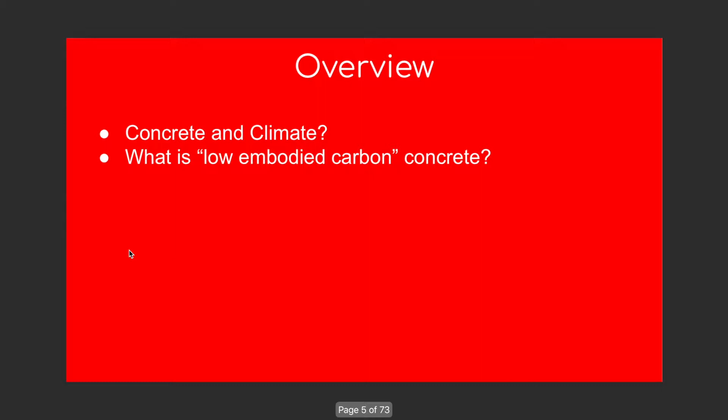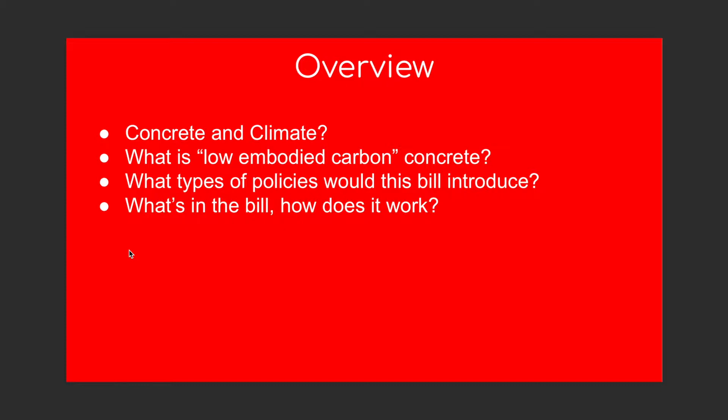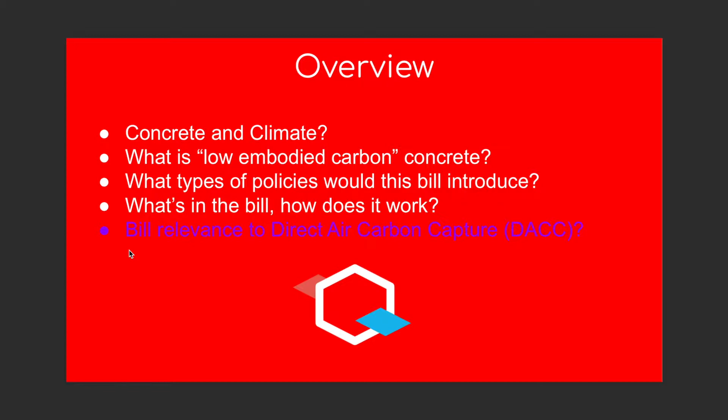I'm going to give you a quick overview in this video. First, why does concrete even matter to climate, since this bill is focused on concrete? What does low embodied carbon concrete even mean? You saw that right in the title of the bill. What types of policies does this bill actually bring together and introduce? Then I'll take a deeper dive into how those policies would work in practice based on how the bill is written. I'll also quickly allude to why this is even relevant to direct air carbon capture, which the OpenAir Collective is focused on advancing. I'll end with a summary of the key strengths of the bill. So let's get right into it.

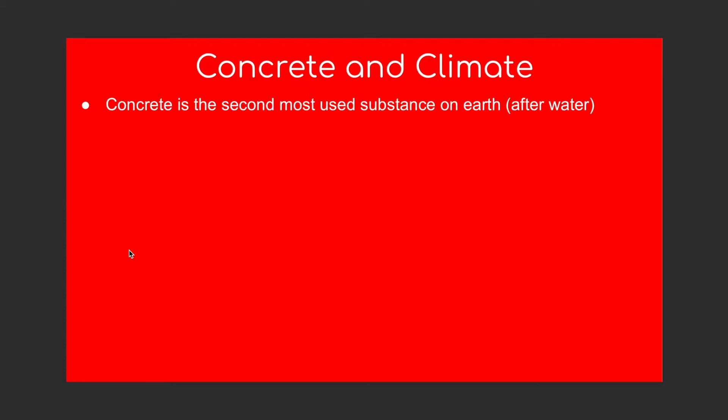First things first, concrete and climate. Why does it matter? Well, first, concrete is the second most used substance on Earth after water, so there's a ton of it, and that's key to its relevance here. And we keep using more of it. In fact, between now and 2050, it's estimated that we're going to build the equivalent of about one New York City a month in terms of global construction, and that's going to involve an enormous amount of concrete and Portland cement, which is actually the main ingredient, the glue of concrete. We produce about 4 billion tons of that a year, and this is continually increasing. According to the International Energy Agency, we may have up to a 23% increase in Portland cement by 2050.

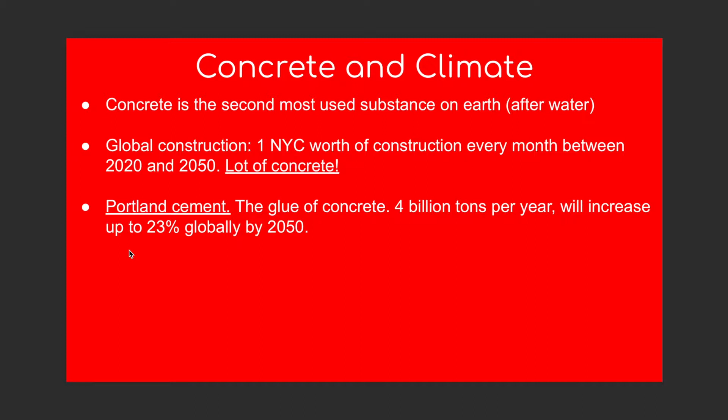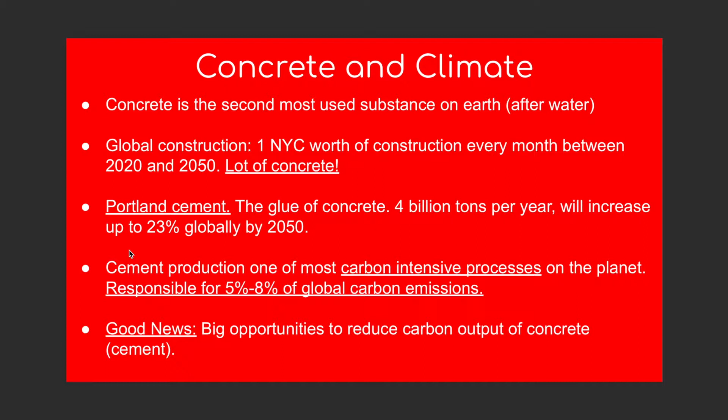Why does that matter? Because Portland cement production is one of the most carbon intensive processes on the planet. It produces about a ton of carbon for every ton of material produced, and it's responsible for up to 8% of global carbon emissions. Now, the good news is that there are really large opportunities to significantly reduce the carbon footprint of concrete, particularly that cement component, which is really at the center of its carbon footprint. And even, which is incredibly exciting for us, there's the potential for concrete to be a net carbon sink. That means it would actually remove more carbon dioxide from the atmosphere compared to what it emits. That would be an enormous victory for humanity and for the climate. And that is really at the center of what the OpenAir Collective is all about: carbon removal. That really explains our engagement with this legislation.

Now, what do we mean by low embodied carbon concrete, which again is right there in the title? Let me explain. Embodied carbon, unlike what's sometimes called operational carbon—a lot of times when we think about carbon emissions, we think about how much carbon is that thing going to use: that car, that building, that plane. Embodied carbon actually is a measurement of how much carbon was emitted in the making of that thing. And that's really what's significant when we're talking about concrete.

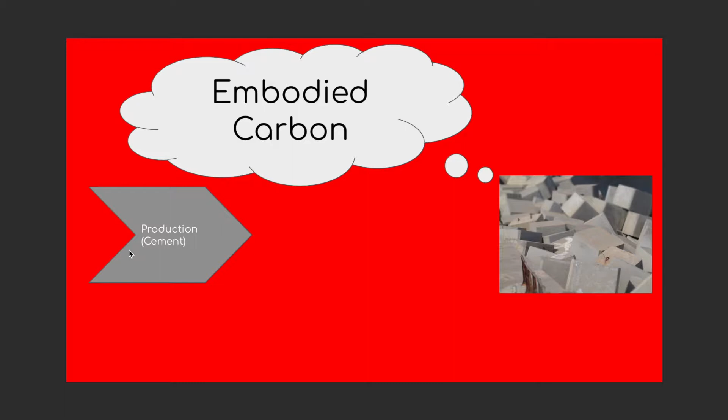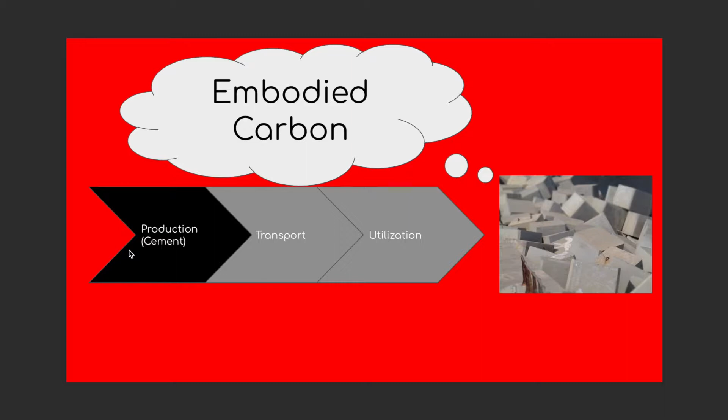That means the production, particularly of cement, which again is the huge outsized part of the carbon footprint of concrete; the transportation—a lot of cement is actually imported from other places that goes into concrete ultimately locally; and then the utilization, the actual laying of concrete, which has some carbon output anyway. So you take all those things together, and that's embodied carbon: how much carbon was used in the making of that thing. And again, cement is the outsized, huge part of that—the actual cement production, the main ingredient.

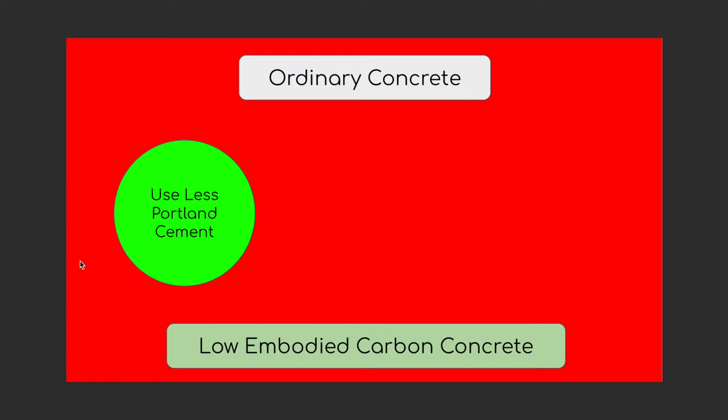Now, how do we get from ordinary concrete to low embodied carbon concrete? What are the methods of doing that? As you might guess: use less Portland cement—we already probably use too much cement in concrete anyway—but you can also substitute other ingredients for it. Use less energy at the facilities where you're making cement and concrete, and waste less material. A lot of the material that's produced, particularly in the cement phase, is just wasted.

So you're expending a lot of carbon for no reason. Reduction in energy, change in energy use, and more efficient use of materials would reduce the embodied carbon. And then the other one, which we're really excited about, is to really use more carbon in the actual concrete itself.

By that, we're talking about what's often called CCU, or carbon capture and utilization, where you're taking carbon that would have gone to the atmosphere, or is in the atmosphere, and actually putting it in the thing itself. That is what makes it of great interest to OpenAir.

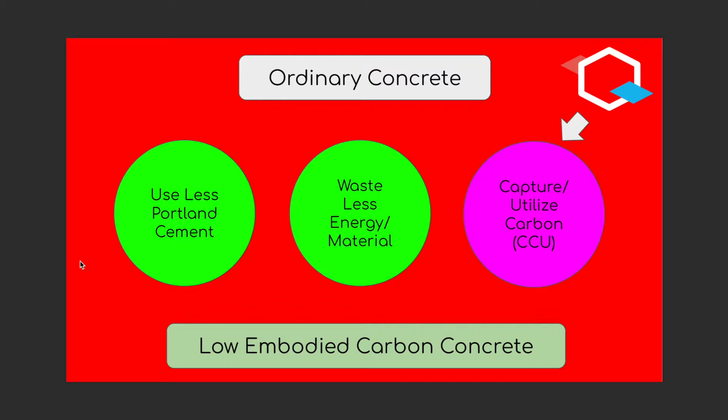Now, how do you actually do that in the case of concrete? How are you capturing and utilizing carbon? One thing is with aggregate. Aggregate is like the gravelly type of thing that you mix with cement to make concrete. You can actually make aggregate out of a process with carbon, pulling carbon from industrial sources or from the air, and then mixing that in with cement to make the concrete. So aggregate is one way.

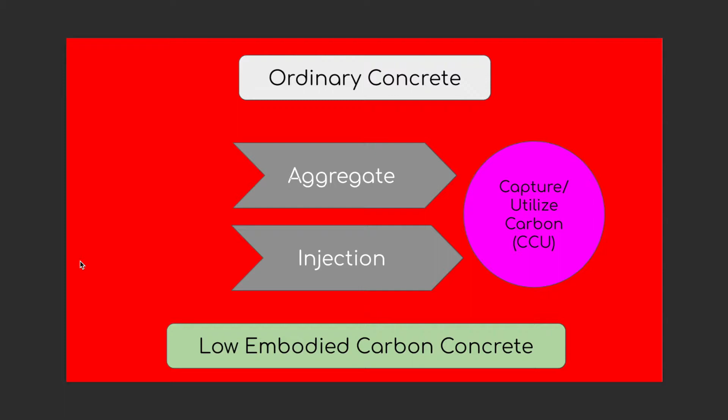And then the other is you can actually inject carbon dioxide right into the curing process, and that makes it stronger. So both aggregate and injection are two ways of utilizing and storing or mineralizing carbon in concrete.

Okay, now back to the bill: the New York State Low Embodied Carbon Concrete Act.

There's a lot of different ways in which governments can actually support new technologies. We can obviously put money into research and development to improve that technology. You can offer incentives to both producers and consumers so that they will both produce and consume that technology. There are all kinds of different ways you can fiddle with regulations to make it possible for the technology to come to market, or even prevent some of its competitors from having advantages in the market.

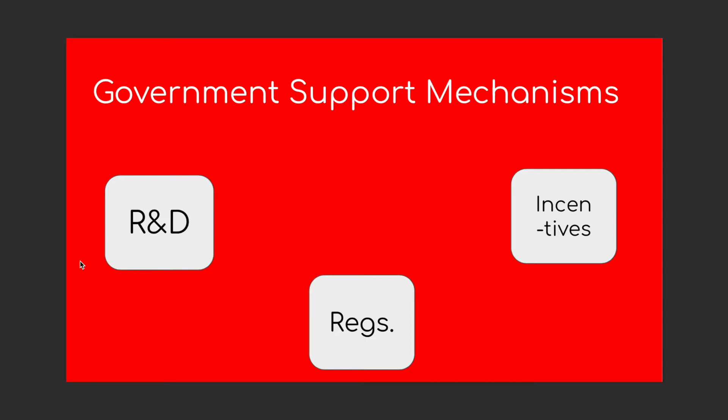And then there's procurement. The state of New York buys a lot of things, including concrete. So with procurement-based policies, you're basically leveraging the state's purchasing power, its procurement power, in order to become an early adopter of certain key technologies, and that can start to shift the market in general.

It can be the first sort of initial shot in the arm for a product, and then the private sector will follow. This bill is, by and large, a procurement-centered type of bill, which I'll explain in a few minutes. And it also adds an incentive onto it in the form of a tax credit for concrete producers, which again I'll explain in just a few minutes.

Now, what is the bill going to do? At the core of it, it's actually going to make embodied carbon totally relevant to the state's purchasing decisions for concrete. So now embodied carbon, along with everything else that you look at when you decide to buy concrete, is going to be a factor. In fact, it's going to be a determining factor in the state's procurement policy or approach for concrete.

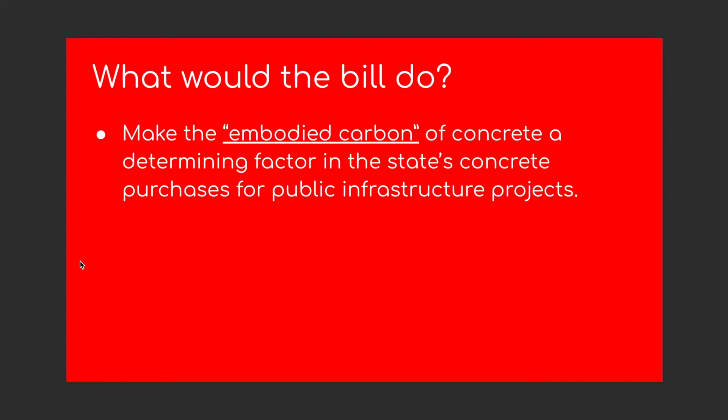And then we're also going to add another little tax credit in order to offset some of the costs that concrete makers would have to bear in order to participate in concrete procurement.

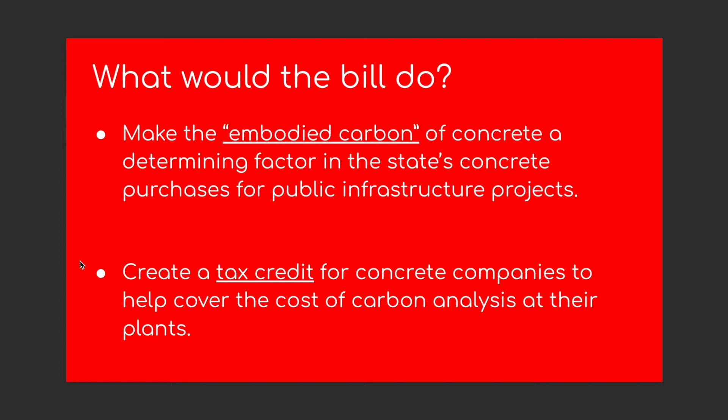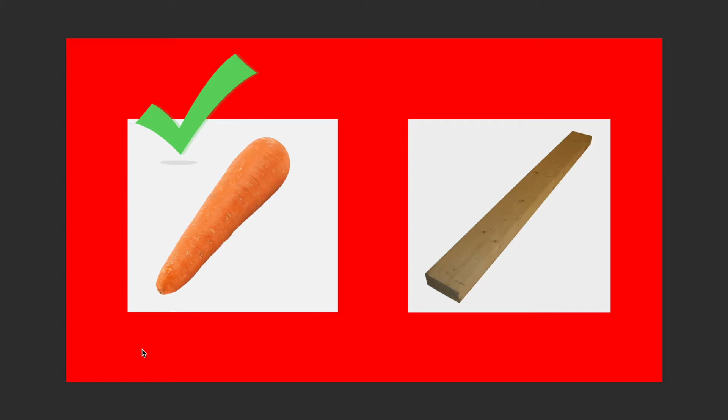Okay, key thing to know about this bill, moving forward, is it's primarily what you'd call more of an incentive or a carrot-based policy than a stick. It's not forcing concrete makers to do a particular thing, but it's creating a set of circumstances that would make it more advantageous for them to actually go ahead and produce green or low carbon concrete.

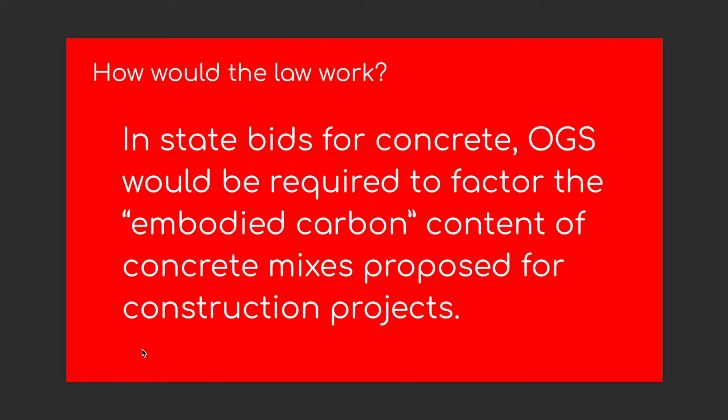Okay, how would it work? When the state is actually accepting bids for concrete purchases, the Office of General Services, which manages procurement for the state, will be required to look at what's the embodied carbon content of the concrete mixes that are being proposed for different infrastructure projects.

Okay, the key thing there is, how do they even know, how do they measure or compare the embodied carbon between two different options? This is a really key part that's written right into the bill. There is a methodology for doing this, called environmental product declarations, or EPDs.

These are analyses that actually measure the overall environmental performance of a particular thing, including carbon. So again, as before, when we were talking about embodied carbon going into concrete, an EPD would actually do an analysis.

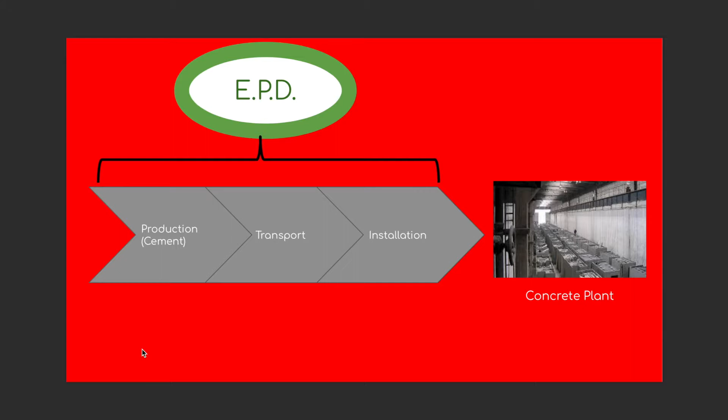It takes a few weeks, I am told, to actually trace back all the different phases of production that have different environmental impacts. Now, again, EPDs measure general environmental performance, but at the center of that is what we call its global warming potential, or GWP number. So an EPD will be able to tell us what is the embodied carbon of a particular mix at a particular concrete plant.

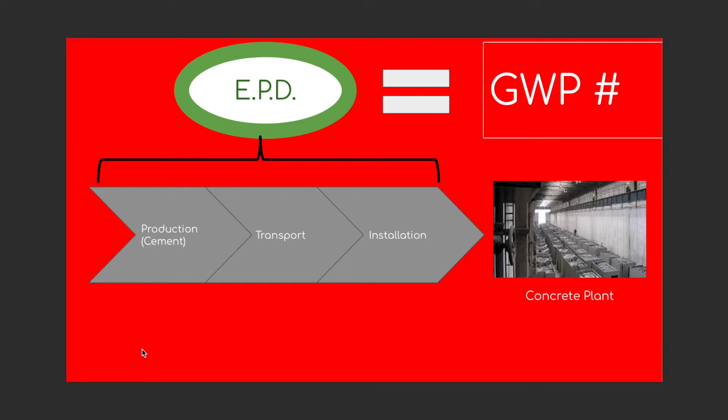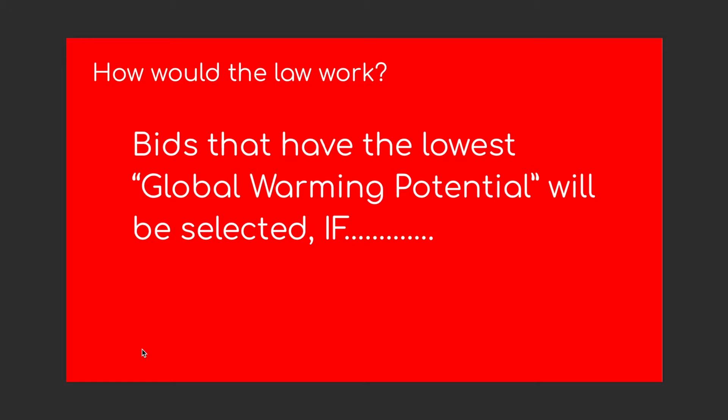Okay, now, bids that have the lowest global warming potential number as determined by an EPD are going to be selected if they do a couple of different things. One, obviously the concrete has to meet the state's specific structural criteria. It can't be an inferior form of concrete. It has to do the job of concrete really well, according to the state's own requirements. And then it also cannot add to the cost of procurement relative to the going market rate for conventional concrete at the particular time of that procurement process.

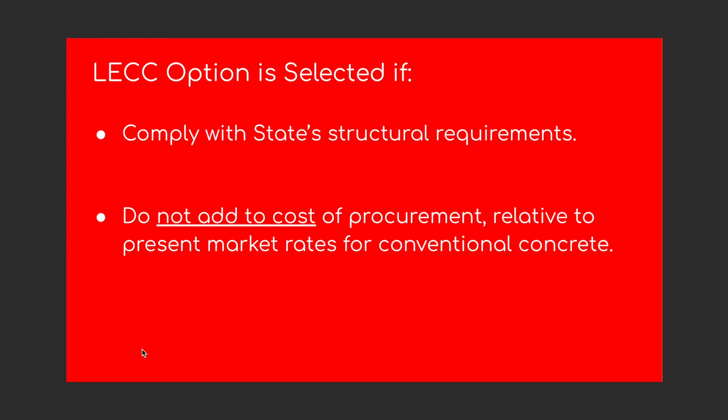So how would this actually work in practice? Let's take, for example, 3 different bids coming in for a procurement offer: bid 1, bid 2, bid 3. Bid 1 is just regular concrete. Let's say it costs $100 per unit. It has a 100 global warming potential number. That's high. Bid 2 is a lower carbon concrete. It has the best performance of the 3. Let's say it produces half of the embodied carbon of bid 1, and it costs the same. And then bid 3 is also a good low carbon concrete, but not quite as good as bid 2. In this situation, all things being equal with cost, bid number 2 is going to win.

Now, let's say bid number 2 is actually more expensive than the others. In this case, the winner would be bid 3 because it's lower cost and it has really good carbon performance as well. Now, if both of these are too expensive and priced out, then the winner would be bid 1, the regular concrete. So this is good for the taxpayer, but it also puts pressure on low carbon concrete producers to continuously lower their pricing.

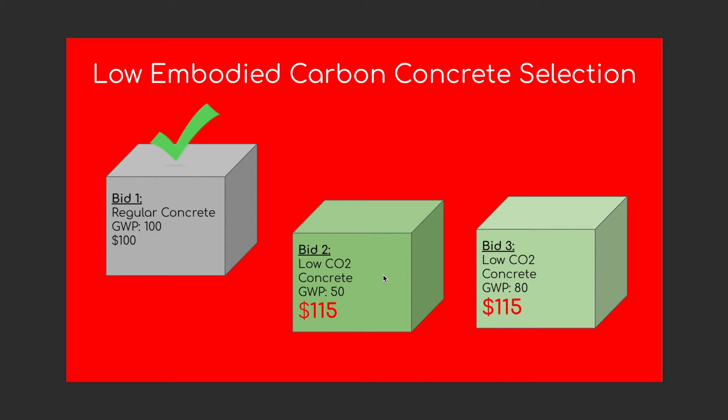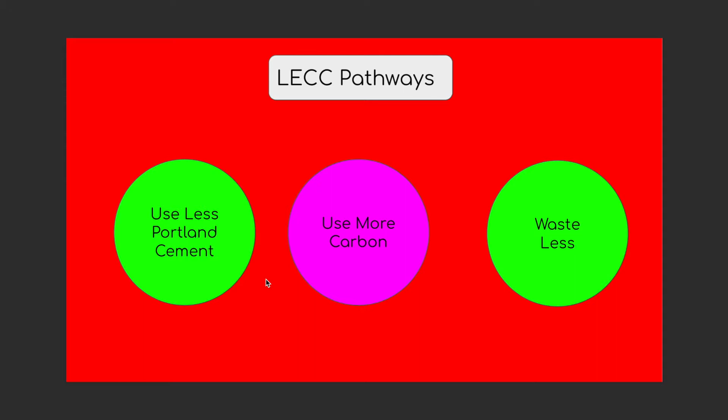Now, one thing that we're really excited about, which has to do with that carbon capture and utilization option, because we're all about carbon removal, is that we created a special incentive for low carbon concretes that are carbon capture and utilization concretes. How does this work? It's basically kind of like a tie break, and it gives a little bit more of an allowance on price for these types of mixes.

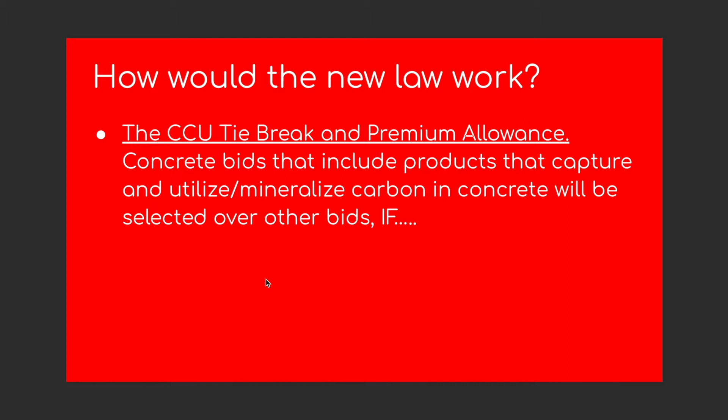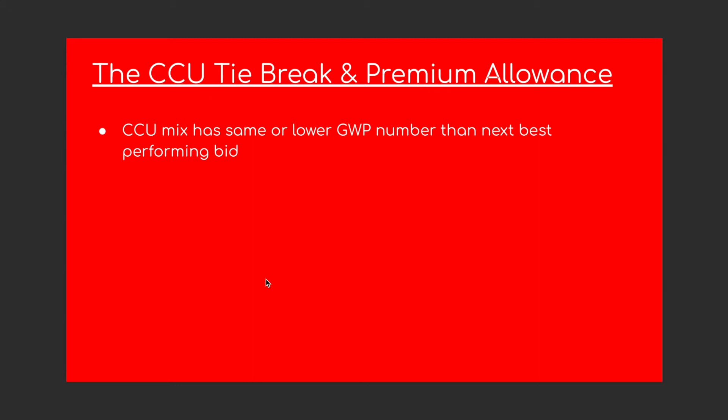So bids that include products that capture and utilize or mineralize carbon, storing carbon forever in the concrete, are going to be selected over other bids if they are the best or tied for best for their global warming potential impact numbers. So they have to be the best in that category. And they obviously can't be an inferior mix. They have to demonstrate that they meet all the structural standards of the state. But here they get a little bit of an allowance on price.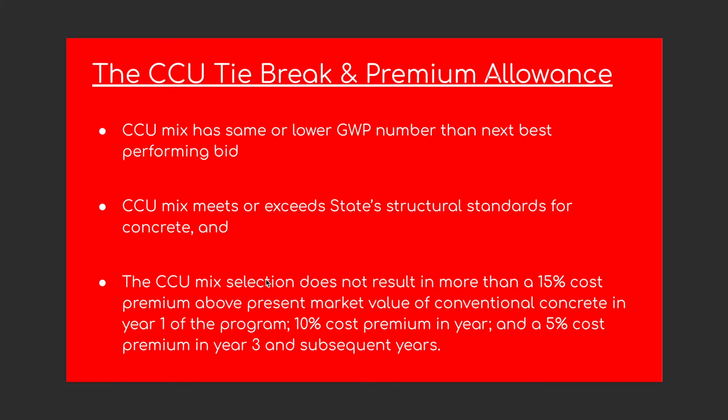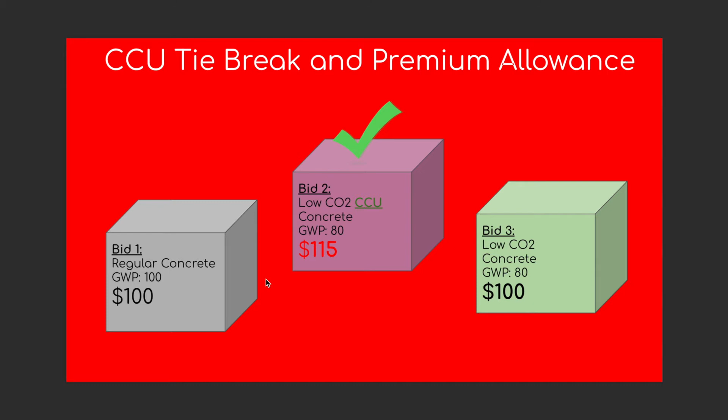So this is an example where that $115 per unit concrete, if it's a CCU, it takes carbon out of the air or utilizes carbon and puts it in the concrete. And this is the pathway we're going to have in order to get to net negative carbon one day, through these types of mixes. It can be a little bit more expensive and it's going to be selected. And again, what is it we mean by capture? This is an important part for the OpenAir Collective.

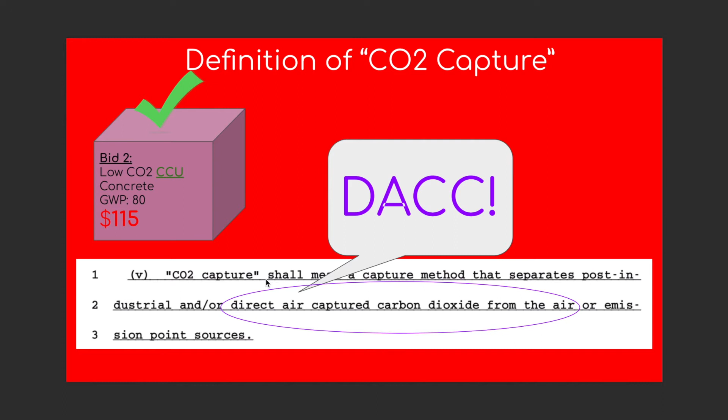There's language right in the bill that specifies carbon capture in these types of mixes can be directly from smokestacks, from industrial sources, or it could be captured directly from the ambient air. That's written right into the bill. Okay, let me see here. Oh, we already covered that.

Again, this is primarily an incentive-based bill. As I just showed, providers don't have to do EPDs, but it's going to give them a better chance of winning. But there's another more explicit type of incentive we've added here in the second part of the bill, and that is this environmental product declaration tax credit for concrete makers. Now, there is a cost to getting this EPD analysis at your plant, right? It's not particularly costly, but it's enough to maybe get a concrete maker to not do it, right?

So what we're going to do here in the beginning is that concrete makers at their different plants can actually claim a tax credit for up to 8 different plants. Some of these companies own multiple plants. That will actually cover or offset the cost that they had to bear in order to get that EPD analysis. Again, up to 8 plants. We took that from another state's policy that seems to be working well out in Oregon.